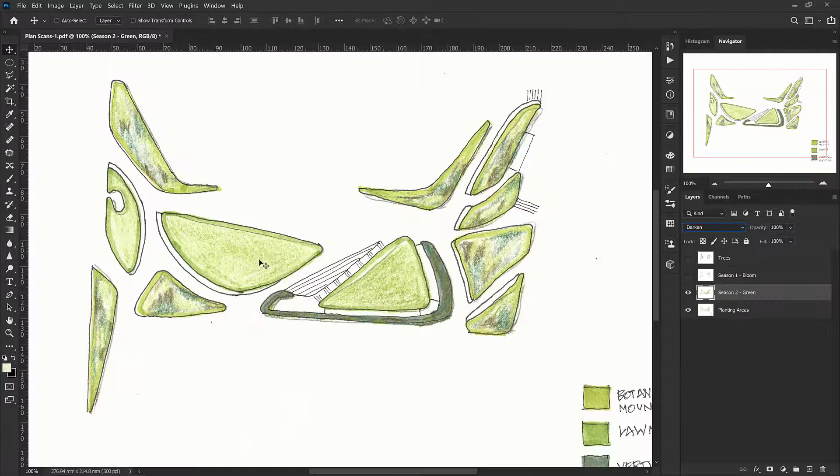Because I was pretty careful when I was tracing to make sure that all my pages aligned, it actually lines up pretty well. But I'm just going to go through and make sure that all of the elements kind of line up nicely, so if I need to make some micro adjustments, I will.

All right, so if I turn on my green layer, it overlaps with my planting areas nicely. And then if I add my bloom, that also works pretty well. And my tree layer on top is pretty well aligned.

So I can turn these layers on and off and export this as a JPEG, and then I could go ahead and overlay that onto a background if I wanted to. Let me see if I can grab the line work and pop it in behind.

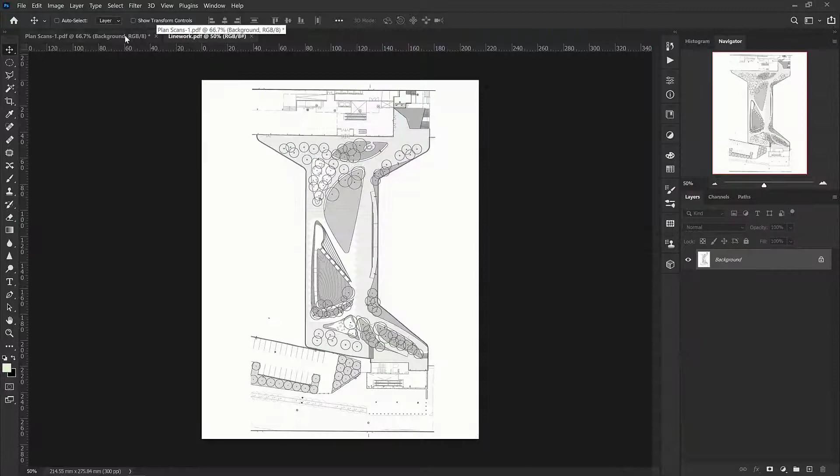Okay, so I'm just going to put that opacity way, way back. And I might have to rotate some of my layers just so that it aligns properly with the plan. So I'm going to put this down to 50 so that I can see everything behind.

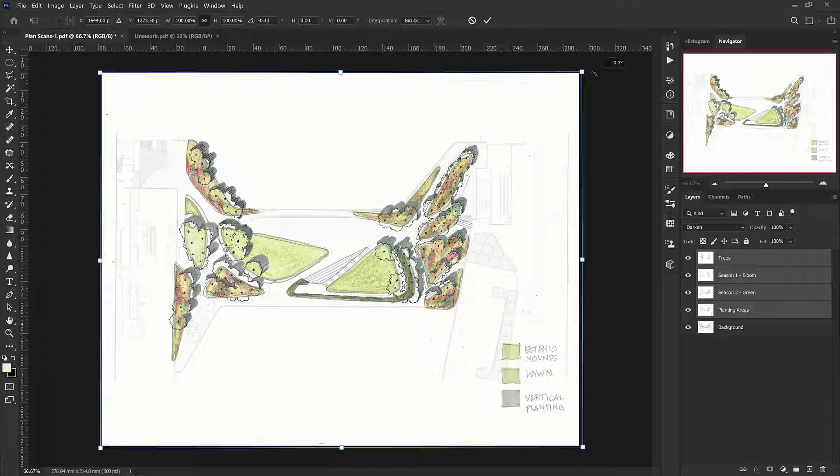Select all of my scanned in drawn layers, and I'm just going to rotate them so that they align better with the line work below.

So now I have a basic illustrated plan. It's just hand drawn, but that's no problem.

If I wanted my trees to have more presence, maybe what I would do is, instead of putting them on darken, I would actually put them back to normal and then select, actually maybe I'll use this, just select all of the outside parts of the trees.

Let's see what that gives us. So that's pretty good, it pretty much selects all the trees and their shadows, and I just have to add in a few of these lost trees down here.

So I can do that with my brush tool on a quick mask. And I'm just pressing E for eraser, and I'm going to get rid of all of these red highlighted parts here, which are part of the quick mask that I don't want.

So now just the trees and their shadows are selected in my quick mask. I'm going to press Q to exit the quick mask. And then you can see that the part that is selected is all of the white area surrounding the trees. So I'm going to do a Shift Control I to select the inverse.

That will give me just the trees being selected, and I'll do a Control J, which is a duplication. So if I turn off the tree layer now, I have my tree layer with a white background on the trees so that they have more prominence over top of the plan.

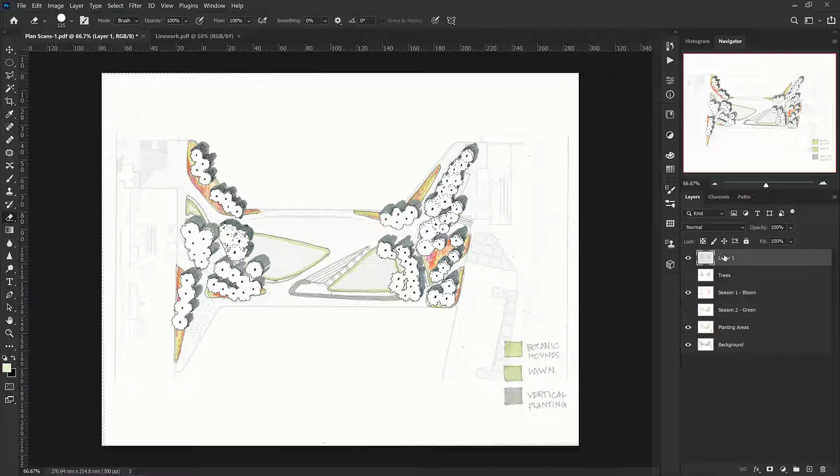And I can then control this. So I'll go trees isolated. If I want to bring that down a little bit to 60% or something like that, I can.

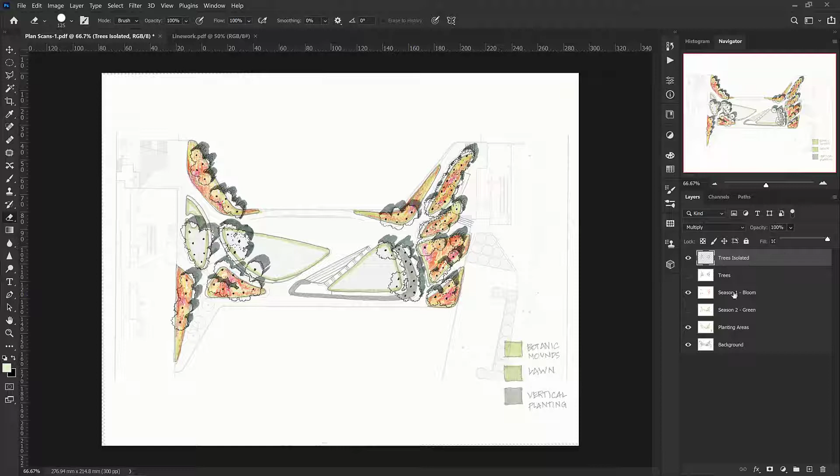Or if I wanted to just put it on a different blend mode, maybe I want to do a multiply at 100% so that it takes on a darker tone. I can also double up on my efforts here, so I can do the bottom layer at 60% and the top layer multiplied. And now I have more control over the impression that those trees give.

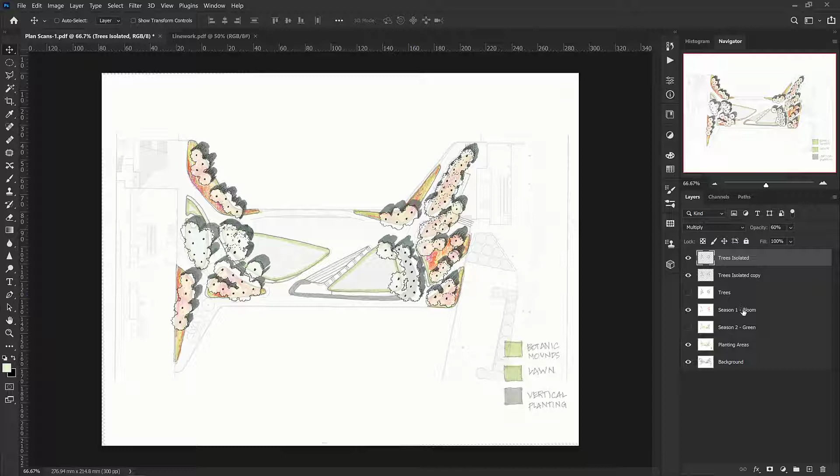So this is how you could pretty easily work in layers to build up a hand-drawn rendered plan. It's not perfect, it's not super precise, but this would be good for checking in with Patrick or me and Daniel to give us an idea of exactly what you're thinking about.

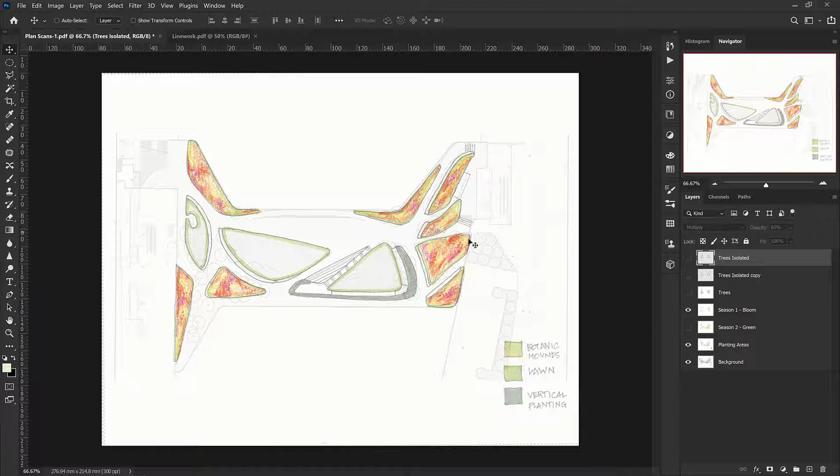All told, this took approximately 35 minutes after I had printed out these basic forms from the plan. So it's not too much of an effort to put this together. And I think that the results are actually pretty nice and really do help get the point across.

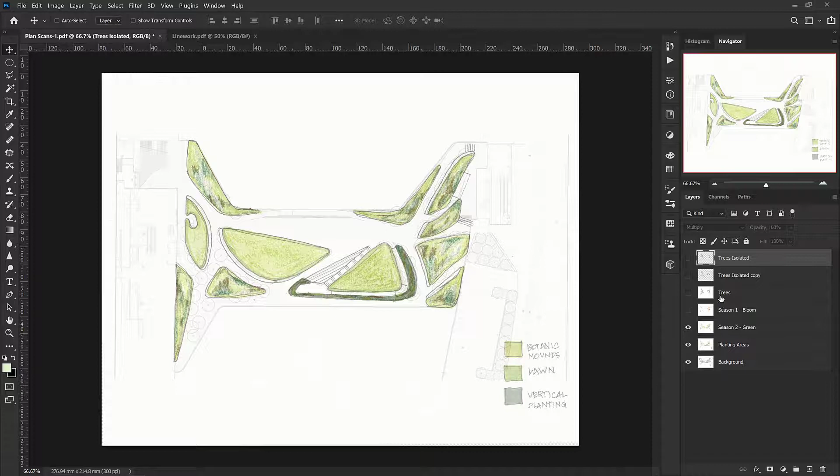So consider this if you're having trouble conceiving of doing a rendered plan in Rhino and trying to render it in Twinmotion or Lumion. This can be also a good option for you to get your ideas out there really quickly. Of course, save it as a JPEG once you're done, and save the PSD file as well so you can always go back and add or remove the layers.